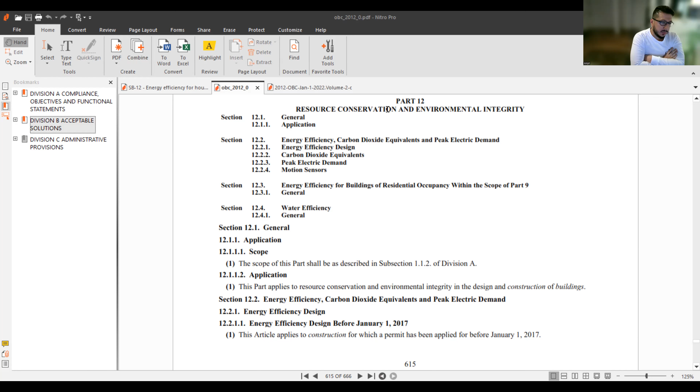So knowing the type of building, I will start with how to reach the SB-12. So before that, in Division B, Part 12 is speaking about the environmental integrity of buildings. So if you ever wonder where to find the actual requirements of thermal insulation or environmental integrity for your building, because we have different sections, chapters, and divisions of where your building would be falling exactly, it's very important to know how to navigate through the building codes and how to reach the right information and the right requirement.

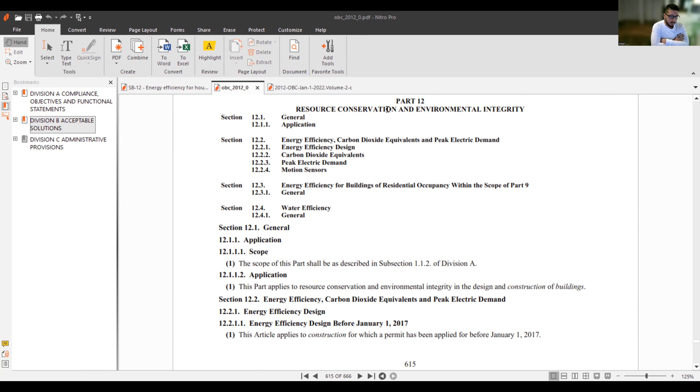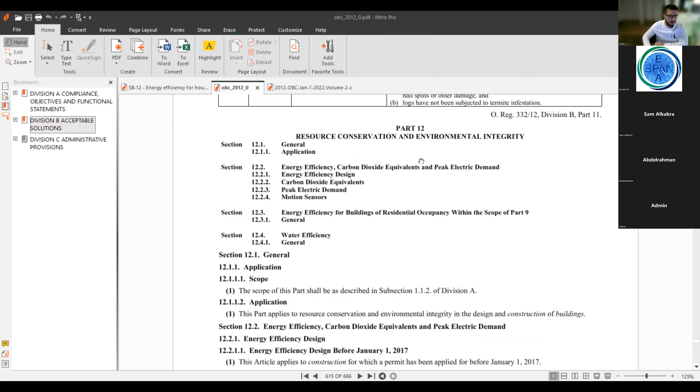So I would start from Part 12 of Division B of the building codes. That would be the first indicating the description of what type of environmental integrity your building is falling within. I'll try to be brief and sufficient to deliver the right information for you today. So it's in Part 12 of Division B of the building codes. The subject of that part is resource conservation and environmental integrity.

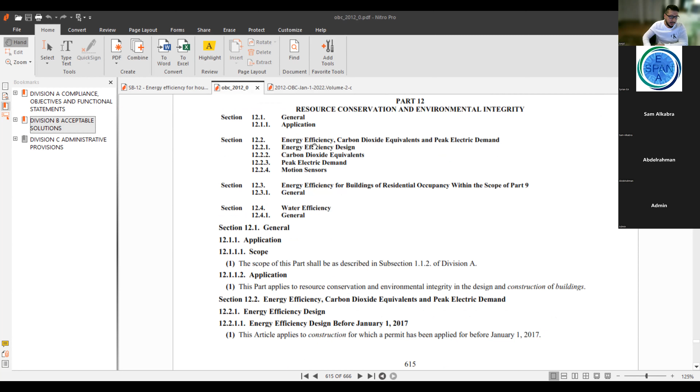So you have two main categories for that. Number one, for buildings designed before January 1st, 2017. And number two is energy efficiency design for buildings after December 31st, 2016. So these are the main two categories you have to look at when you design your building, to see whether your building was designed after December 31, 2016, or before January 1st, 2017.

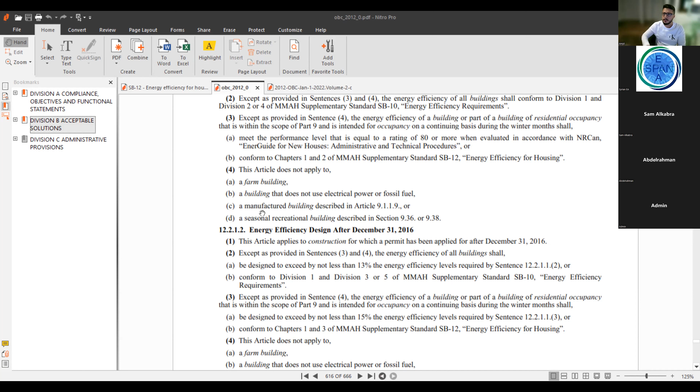Now you would ask me, why would I go to buildings designed before January 1st, 2017? That applies for addition work, and for renovation and alteration work of buildings. So let me ask you a question. So for an addition to an existing building, we go before December 31st? Yes. So if the existing building is built before, even if it's a new addition? If it's a new addition and the primary building was built before January 1st of 2017, that would be falling under that section. Interesting. Okay.

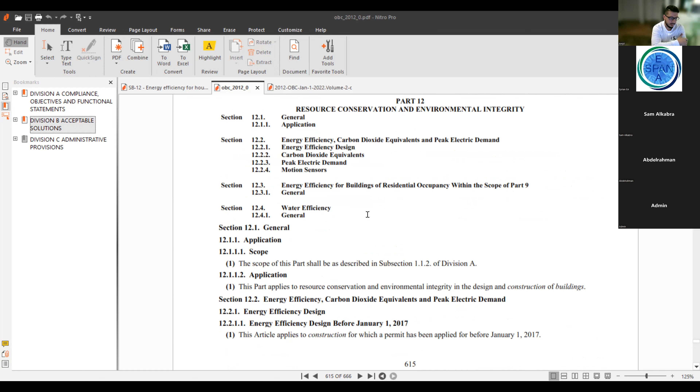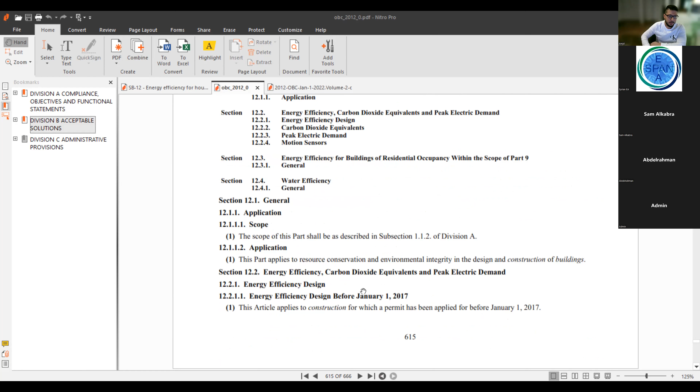And of course, if you're doing an addition to a primary building that was built after December 31st, 2016 until today, then you'll be falling under that section. And that applies for all new buildings as well. So all new buildings would be falling under section 12.2.1.2 of the building codes, energy efficiency design after December 31st, 2016.

Now, the important part is, again, what is the next step? So now we know the scope of work of the proposed building. We know the dates when the building was constructed or to be constructed. We know whether it's going to be a brand new build or an addition. After that would be knowing the category of the building based on its size and its use as per the building code's definitions.

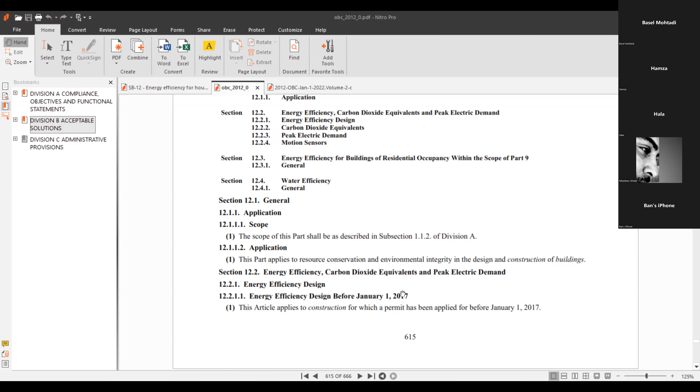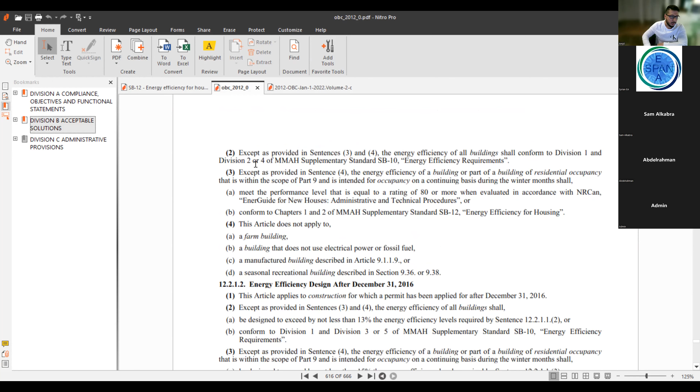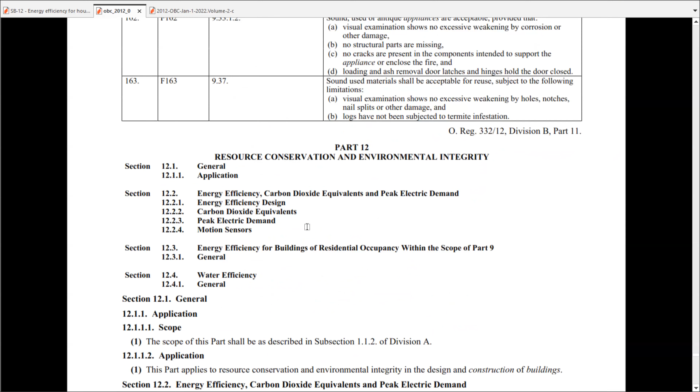As we are getting into the SB-12 explanation today, the SB-12 section of the energy efficiency applies to the following buildings. And I will highlight that. So in number 3, and this is for buildings before January 1st, I'm just going to zoom in on the information. So for the energy efficiency design before January 2017, number 3, except as provided in sentence 4, the energy efficiency of a building or part of a building of a residential occupancy that is within the scope of Part 9.

And this is very important to be aware of. The residential occupancy within the scope of Part 9. This is the key word in determining the actual environmental requirements for your building. So when you have a residential building falling within Part 9 of the building codes, then that would be right away in SB-12 requirements in any case. All other cases will be falling under the SB-10. And that's a totally different subject.

Sometimes people would mix up having a Part 9 building, but it's not residential. When you have a Part 9 building that is not residential, then it's not falling under the SB-12. So this is the key point that we have here. And the other key point, but I'm just going to go briefly.

The other wording, or legal wording, to that is all buildings. So that means all buildings except residential occupancy buildings falling within Part 9. That would be SB-10, conforming to SB-10. So this is where to start from. So if you ever were lost or confused how to categorize your building for thermal insulation requirements, Part 12 of Division B is the reference. You start from there.

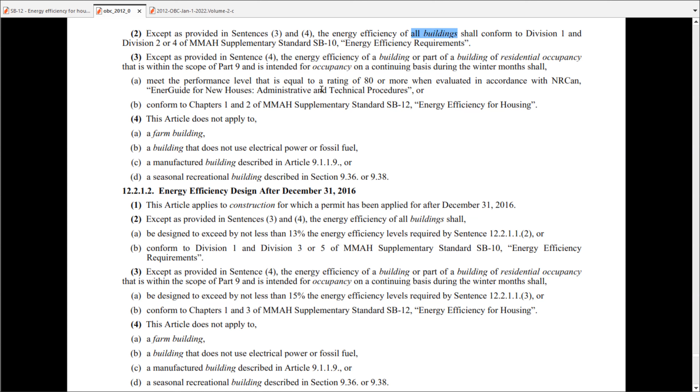And then it gives you, as we said, all residential occupancy buildings within Part 9 will conform to Chapter 1 and 2 of the Supplementary Standard SB-12 Energy Efficiency for Housing. And that's another thing we have to be careful about in choosing the right thermal insulation requirements. So Chapter 1 and 2 would be for most existing buildings, renovations and alterations, or additions to existing buildings that were built, of course, before January 1st, 2017. So that would be in Chapter 1 and 2 of SB-12, and I will be coming to that shortly.

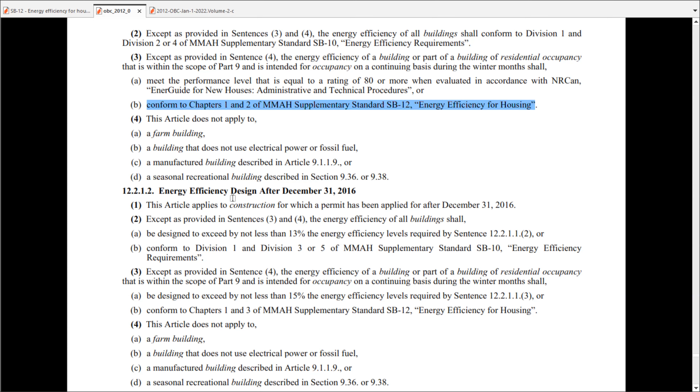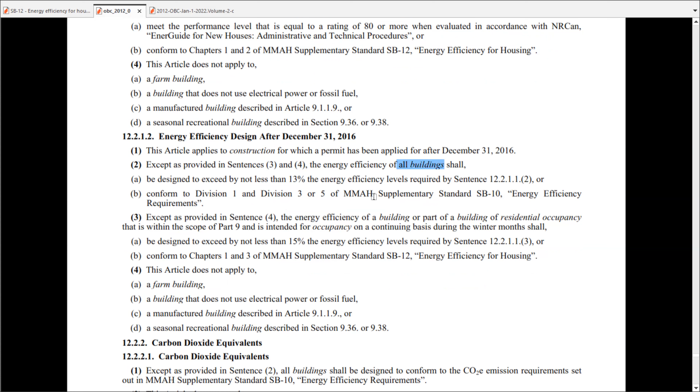Now, what happens to brand new buildings? All brand new buildings will be described in the energy efficiency design after December 31st, 2016. And of course, we have two categories of buildings defined under that section of the building codes. So we have number 1, all buildings. Number 2, residential buildings within Part 9 of the building codes. And then, of course, number 2 explains all buildings requirements, and that is for a brand new building. And it gives you exactly the divisions of SB-10 that you need to search for your thermal insulation requirements.

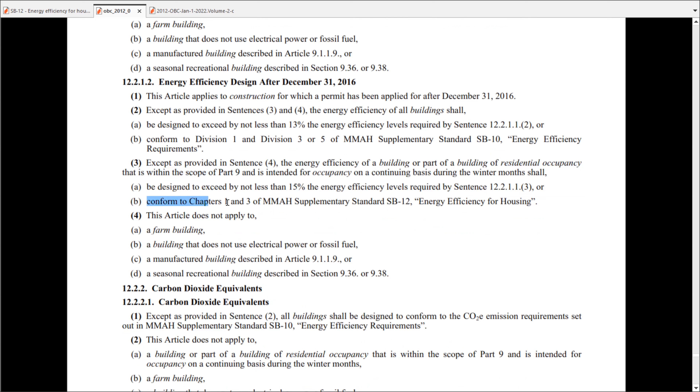Number 3 here shows part of a building of residential occupancy again that falls within the scope of Part 9. And this is the keyword that we have here. It's very important that we know the size of the building and the type of occupancy. So residential occupancy, Part 9 buildings will be in SB-12 requirements. And then it tells you that it should conform to Chapter 1 and 3 of SB-12. So we know right away that brand new buildings we will be designing for residential occupancy within Part 9 will be falling under Chapter 1 and 3 of SB-12.

So this is the start where we will navigate through the building codes in order to achieve the minimum performance required as per building codes for the environmental integrity of the building. I hope everything is clear. If you guys have any questions, please let me know before I move to the next stage. No, this part is clear, I guess. Yep. Okay. So now we will go to SB-12 of volume 2 of the building codes.

Quick question. So Amjad, how different are they, before January and after December? Yes, very different. There are lots of details involved. But are there some main points that are similar in both? In concept of how to use them, are they the same? Like if you explain one, can we figure out the second type? Sorry, could you repeat your question? If you explain one of them, would they be similarly used, in terms of how to navigate through it? Yes, it will be the same method of how to navigate through them.

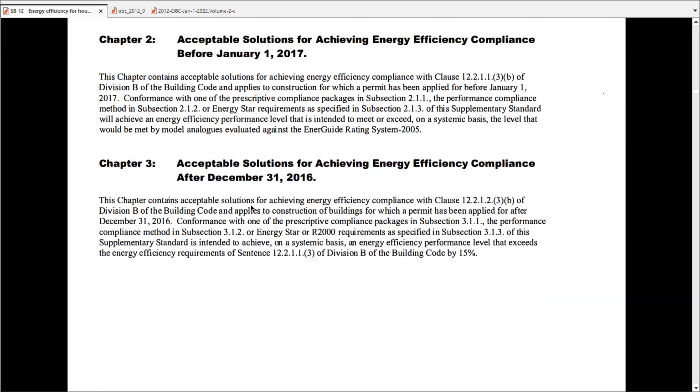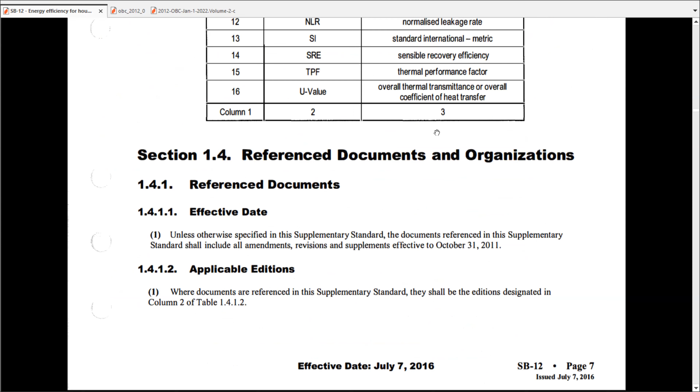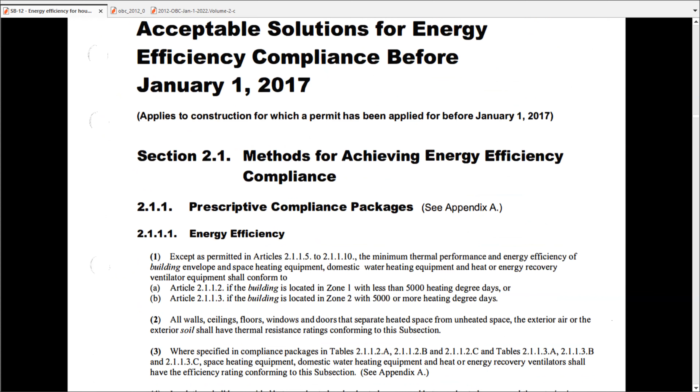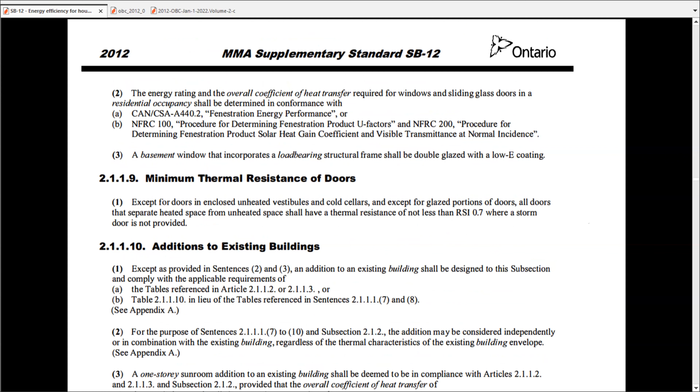So chapter 1 is general for both. It explains to you all the general terms, defined terms, all the abbreviations, reference documents. And then chapter 2, as we said earlier, will be for energy efficiency compliance before January 1st, 2017. And chapter 3, I'm just going to navigate quickly to chapter 3. Chapter 3 will be the acceptable solutions for energy efficiency compliance after December 31st, 2016.

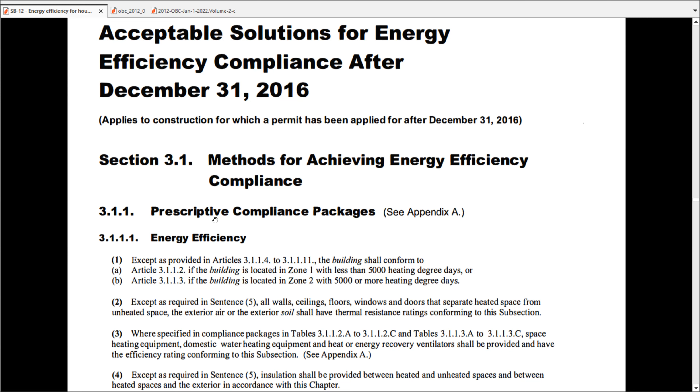So what are the methods for achieving energy efficiency compliance? The prescriptive compliance packages. These are the packages defined by building codes. So these are acceptable methods or solutions, proven through testing by building codes for performance. Within that, we have two categories to follow. We have two zones in Ontario that the design of the thermal insulation is based on.

Number one is zone 1. What does that mean? The building is located in zone 1 with less than 5,000 heating degree days. This is very important to know about as well. You have to know where your building is located. And SB-1 of volume 2 explains the climatic and seismic data of different locations in Ontario. We have to refer to SB-1 in order to identify the number we have for the city in Ontario that the proposed building will be located at.

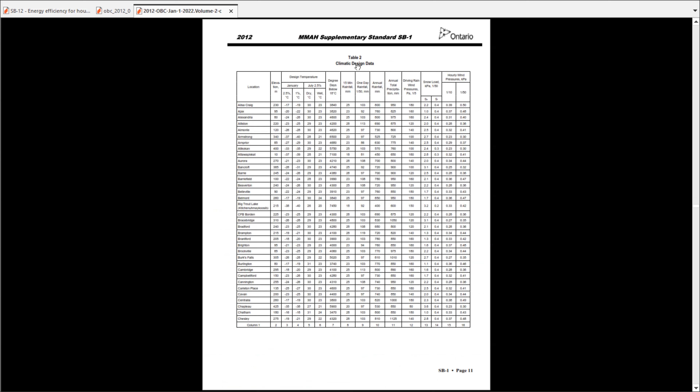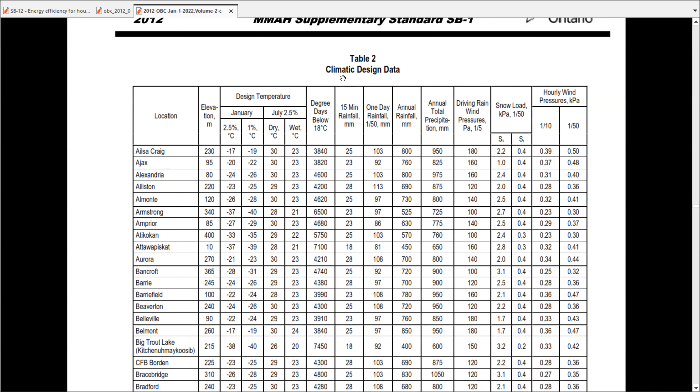I'm just going to go to SB-1. I'm going to show you an example of what to look for. In the climatic design data, you have a table for all the cities in Ontario, and they are in alphabetical order. And it shows here the degree days below 18. And then you have this number here. And that is what SB-12 is asking you to look for before determining the actual thermal insulation requirements for your building.

What does that number mean? That number means the amount of heating required to heat buildings in a year in a location that has days less than 18 degrees. So what is, let's say, the coefficient of heating this building per square meter, square foot? I don't know, I did not go through the detail of how they came up with these numbers. But this is the amount of heating required for such a building for days below 18 degrees.

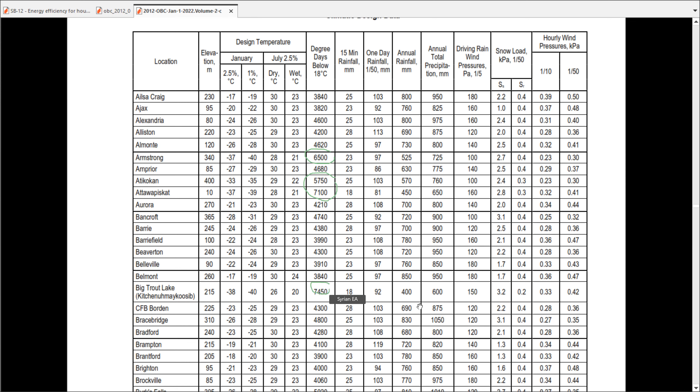So in other words, higher numbers of degree days below 18 Celsius mean that it is a colder area in Ontario, because you need more heat to warm up that building. And this is the definition of zone 1 and zone 2 as per SB-12 and why they are asking for that. So zone 1 would be everything under 5,000, and zone 2 is everything over 5,000, like the one I highlighted? Yes, exactly.

And fortunately, the Southern Ontario area falls under 5,000; we have warmer days, warmer cities, of course. So in the GTA area, usually it is under 5,000. So the amount of heat required to heat up a building during the year is less than 5,000 units. So most of our GTA region, even Ottawa, where I'm from, falls under 5,000. The over 5,000 is more the northern part of Ontario, because it requires more heat, of course, to heat buildings.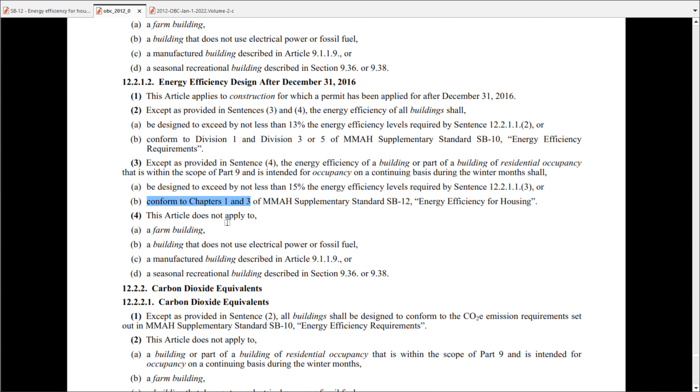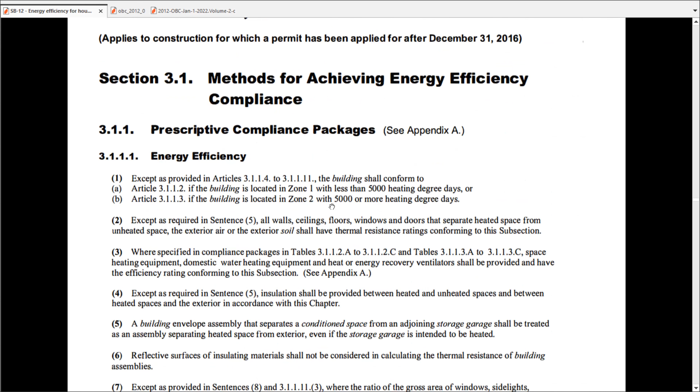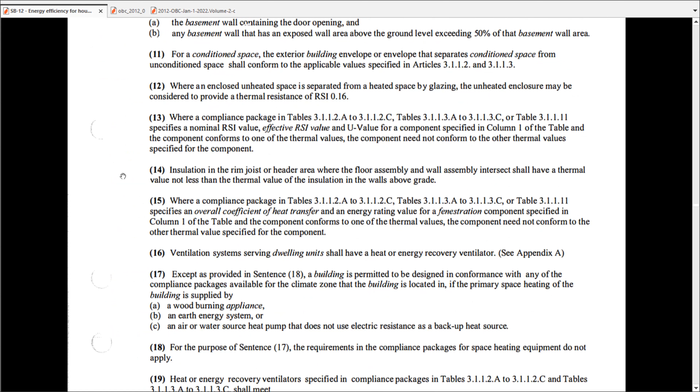Okay, so for the sake of example, we'll say our hypothetical building is zone 1, and let's continue as if we have a building in zone 1, right? Yes, I will show you that. Okay. Now, after that, from Article 1 to Article 22, these are very important requirements you need to go through. It tells you the methodology of what to include and what not to include.

The most important part, as we come now to these buildings: let's say we have a building now, it's brand new, it's located in the GTA area. So that would be a residential building, part 9, of course, less than 5,000 units for heating the building, falling under zone 1. What is next? The most important part.

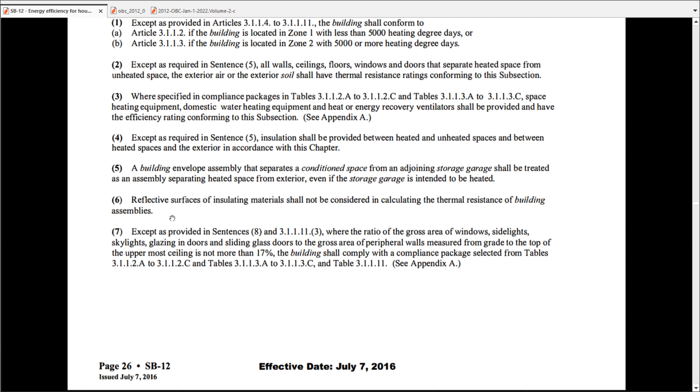And after that, it tells you, I will, Lulu, I think I will bring a real sample now to explain these points. I think that would be more clear to identify some of these points as we go through. Yep.

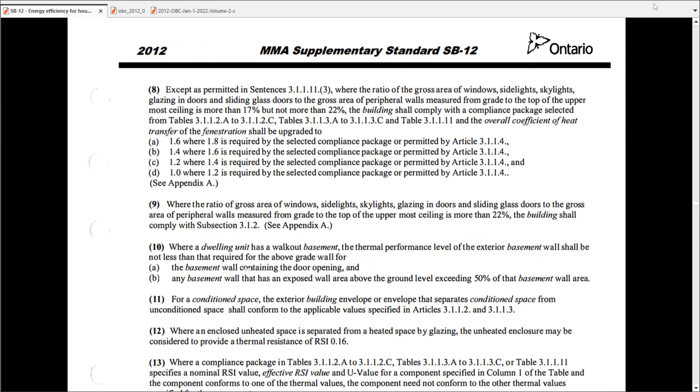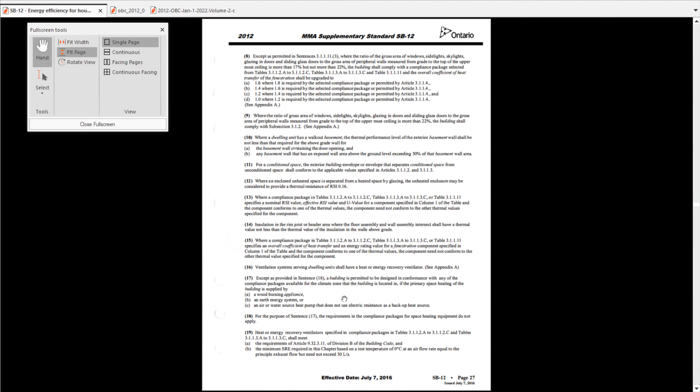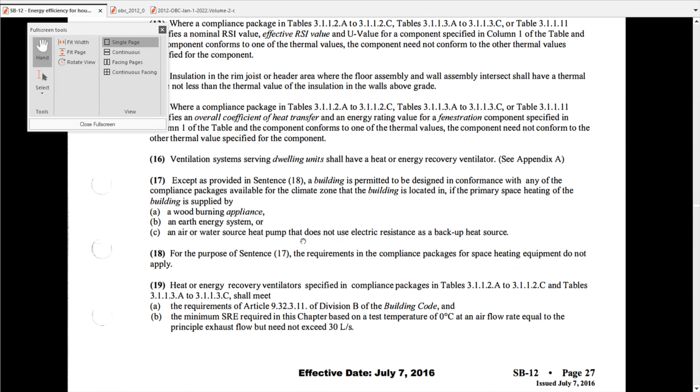But basically what 7 and 8 is saying is that if the ratio of the windows and openings to exterior walls is less than 17%, there are certain tables you follow. And if it's between 13 and 22 or something, there are different tables to follow. Yes, sorry, it's between 17 and 22. These are the numbers that we have.

So anything not more than 17%, which means the overall area of openings to the overall area of exterior walls. And of course, the exterior walls are the walls separating conditioned spaces from unconditioned spaces. In other words, heated spaces and non-heated spaces. So the garage is not considered a heated space in a building.

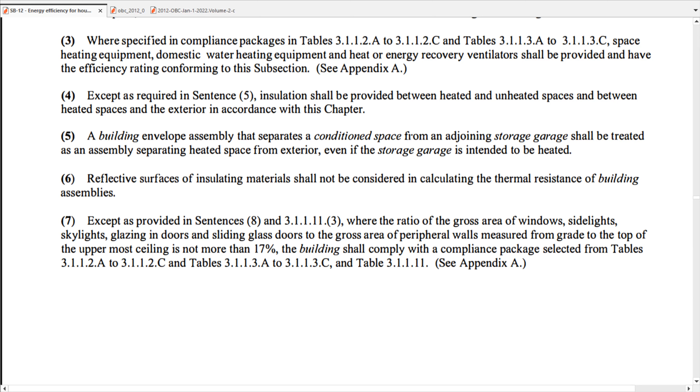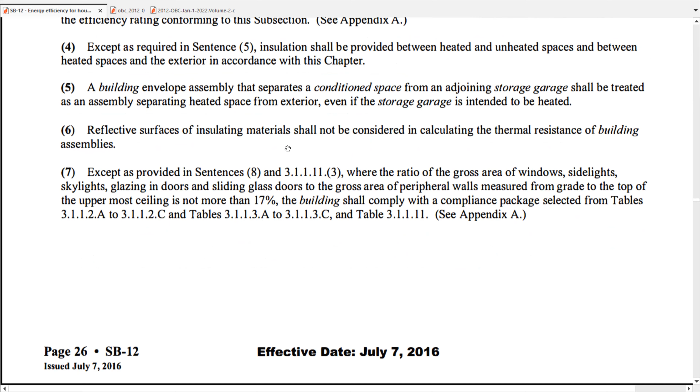So 7 and 8 will tell you exactly the tables that you need to look at for the requirements of thermal insulation in your building assemblies. Then if you have it from 17 to 22%, you would need to fall under different requirements of tables. Sorry, not different requirements of tables. I'm going to be very particular in this one here. The same requirements of tables.

The difference is you need to increase the quality of thermal conductivity of your windows. Because now you have more windows, more openings in your building, you have to have upgraded windows to a certain level to compensate for the increased area of these openings. And of course, they go by the overall coefficient of heat transfer.

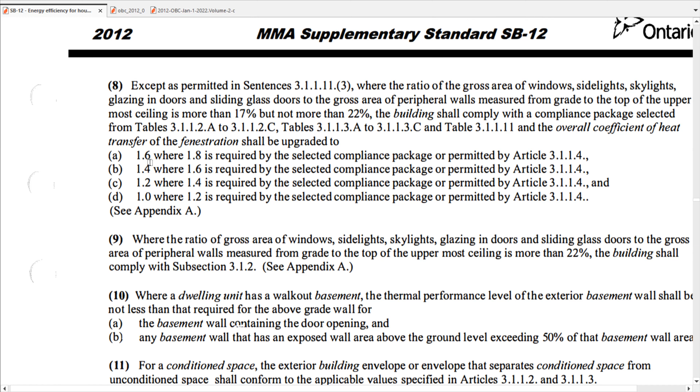The lower the number you have in windows, the more effective they are, because they tend to transfer less heat between conditioned space and unconditioned space. And that's why they're asking you to upgrade your windows in some areas from 1.8 to 1.6, to compensate for the increase in the ratio between windows and walls. And that would be for the 17 to 22%.

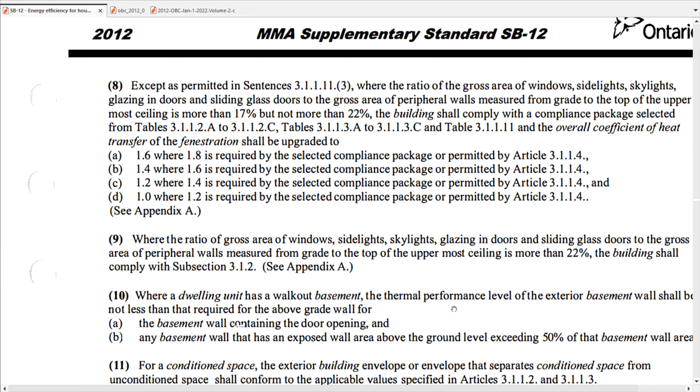And now the other points. Unfortunately, we have to calculate skylight areas as part of the ratio of openings to walls, even though we keep questioning why we would calculate the skylight. So whatever openings you have, including the skylights, need to be calculated in the ratio between overall area of openings to overall area of walls, from grade to the top of the uppermost ceiling.

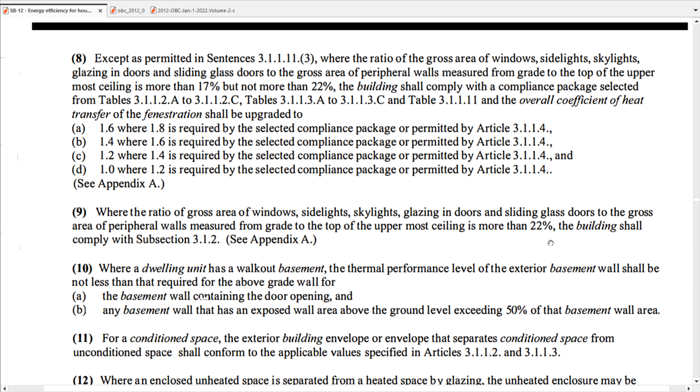And of course, these are more detailed options here, telling you whether you have a walkout basement, how you would treat that, whether you have a door in that walkout basement, and whether it would be included in the calculation. Sometimes it gets really critical. Sometimes you have lots of openings and your walls don't have enough area to achieve a ratio less than 22% or less than 17%.

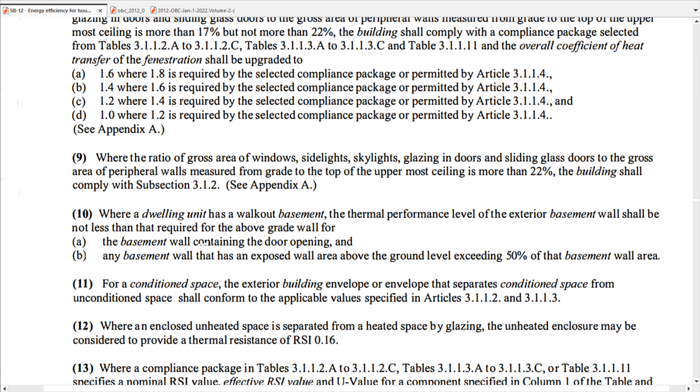Very important to know what to include in the area of the openings. You have to include the rough opening area, not the glass only, not the size of the window only. The difference between the actual size of the window and the rough opening is that we usually leave ½ inch of space around the actual frame of windows for installers to have more flexibility. So we calculate from the rough opening of windows to include in the ratio.

And that's because that's where all the leaks happen if your detail is not correctly implemented. Exactly. So it is important to know what to calculate in the overall gross area of openings. You have to calculate from the rough opening.

And for doors, you only calculate the area of glass. You do not calculate from the rough openings, because doors are solid components that could act as good thermal insulation by themselves, as per the building codes. So you do not need to calculate doors if they do not have windows.

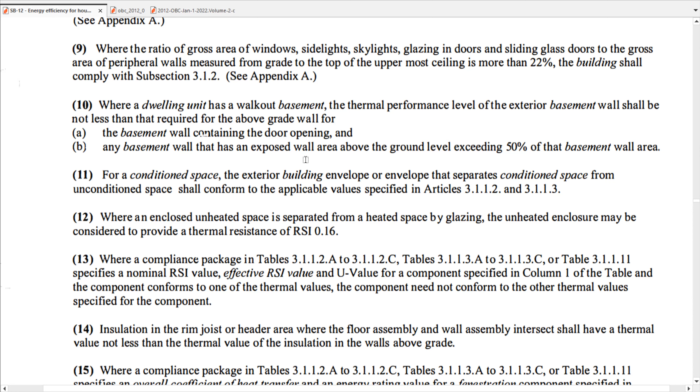So let's say you have a solid entrance door to your building, then you do not need to calculate the area of that door in your calculations. And the same thing would apply for garage doors. You do not need to include